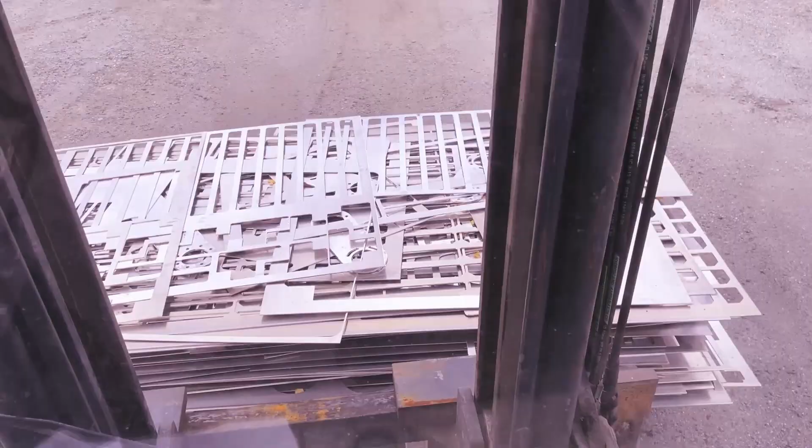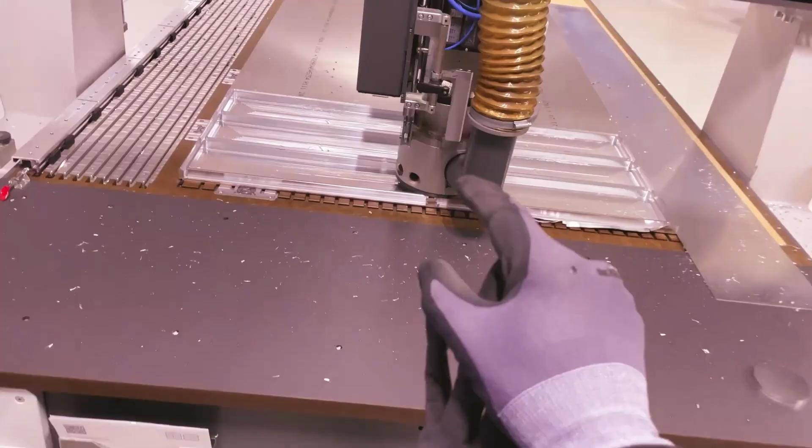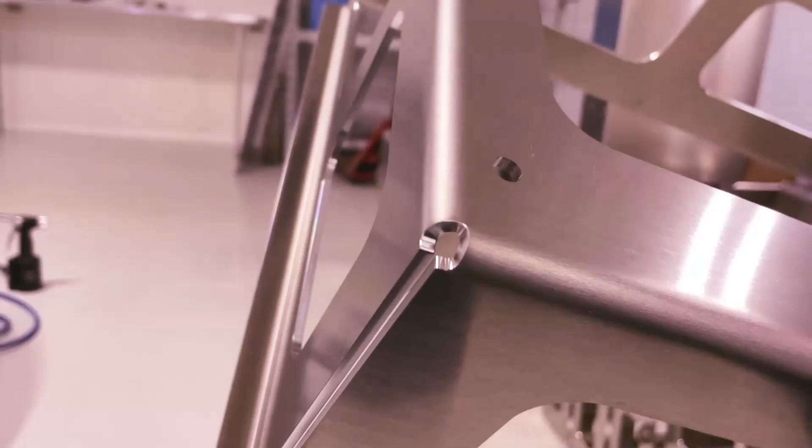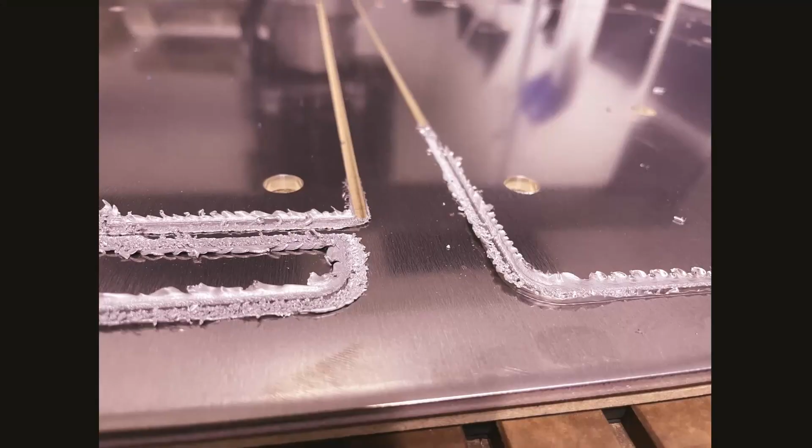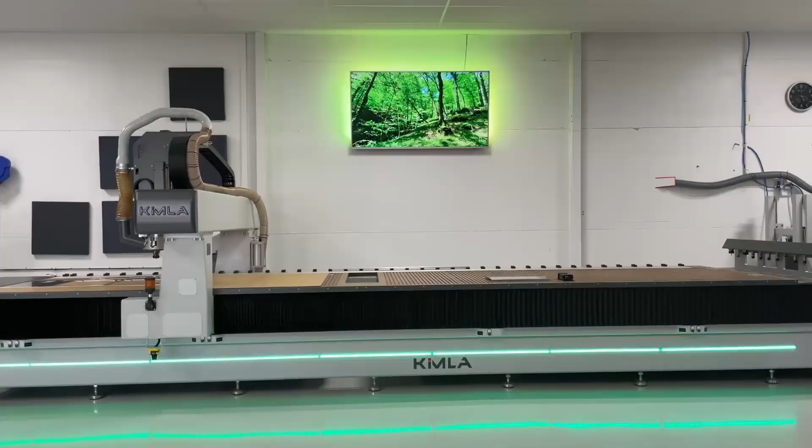So here I am in Västerås in a hotel with my wife, thinking about the only reasonable thing: ABB robots. Hello there.

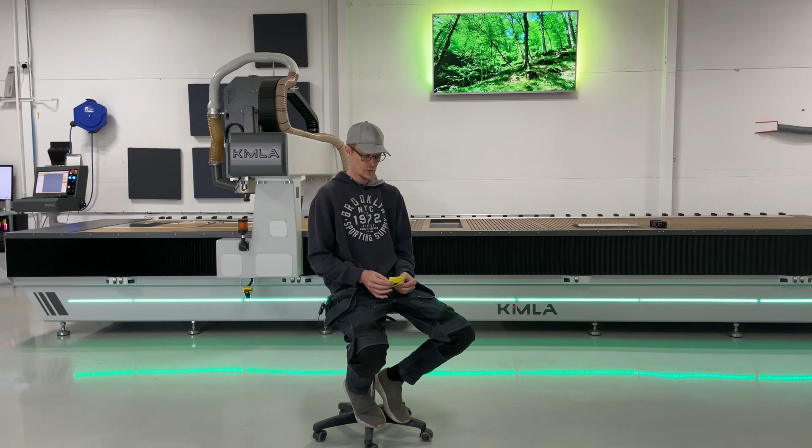So this is going to be quite a long video. There's gonna be everything in here. Hopefully, I say that now, but I'm gonna forget half of it, but you know how it is. So, I don't know if you saw an introduction video like 30 seconds before this, but I hope you did. And to quickly recap, it's been somewhat of a journey, as all journeys are.

So I opened a proprietorship in 2010 alongside my current job. Started off making furniture, mostly poker tables. Maybe there's a video showing you some poker tables right now. I used to drive a truck and be a crane operator before that, during that. And then the person who was holding the camera was born. And I did everything.

And we invented a snow melting machine that melts snow for the city of Stockholm, and it was good. It was exciting for a couple of years, and we got it patented and whatnot, but yeah, that's pretty much over. And I built my own CNC, as most of you have done. Mach 3, etc. Never again. Some Linux CNC too. Watched Grimsmo do his thing. Watched Saunders grow up on YouTube, basically.

And after having built 1.5 machines, I found a used 2000s Multicam router, which I, for a year or two, converted to be better at cutting aluminum, because that was my interest, my passion. There's probably a bunch of clips for that too.

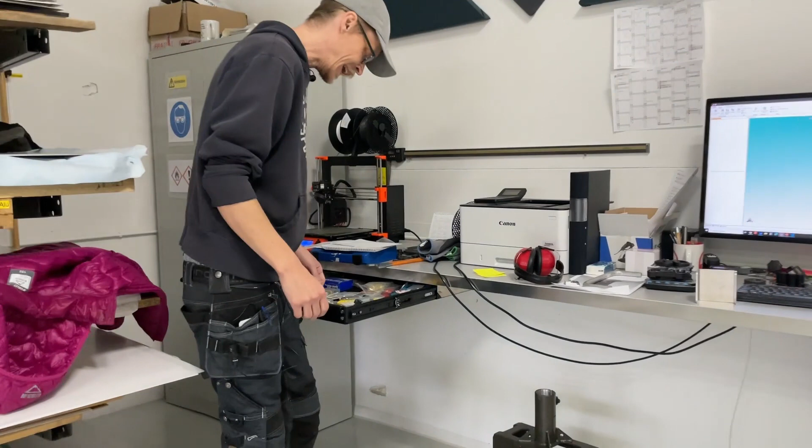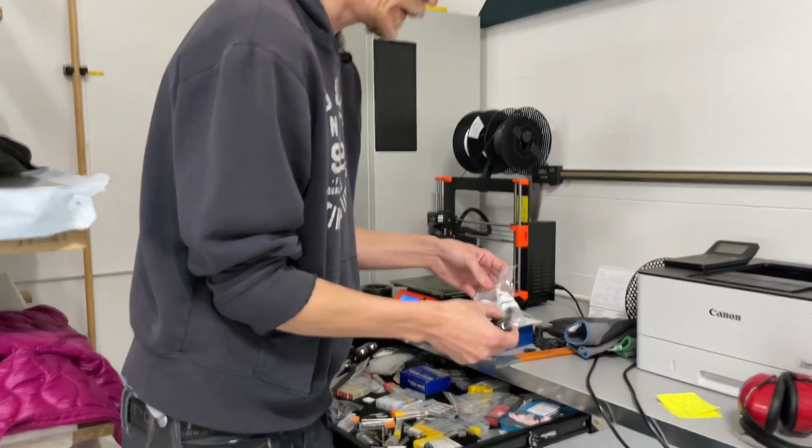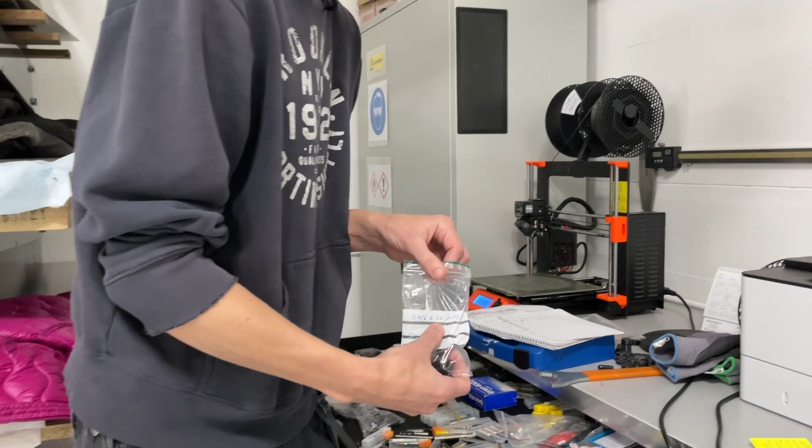So what I did was I bought uncoated 4mm Kronor tools, and I sent them to IonBond to have them coated with their best type of coating, and that coating is really reminiscent of the original coating on the Kronors. Super good, clean cut, no stickiness. So they're my new go-to pretty much. And of course I haven't prepared anything, so I can't find them right now, but anyway.

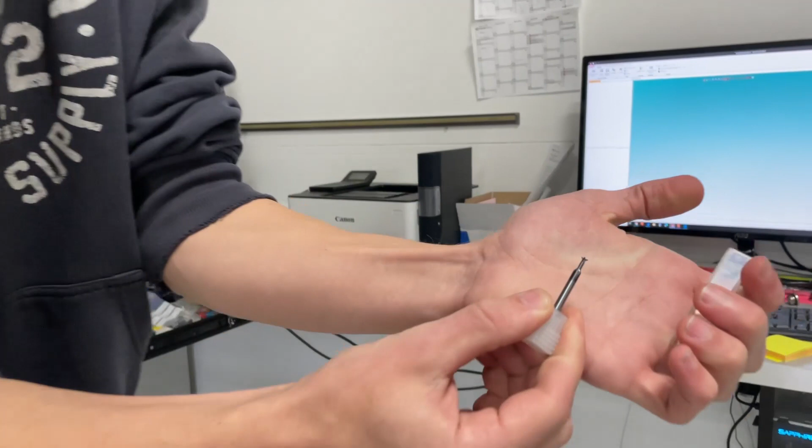Another one of you guys on the net asked about the undercutting tools. I might as well show you those. Hopefully the camera is able to focus. Can you see that? Syns det? So it goes down into the cutout of the 4mm tool. There's a gap, of course, of 4mm since the tool has just been there. So we go down into there and underneath the aluminum edge and all the way around. And then we back out before we go back up again. Hopefully there's some graphics or something I can put on screen right now so you can see how that works.

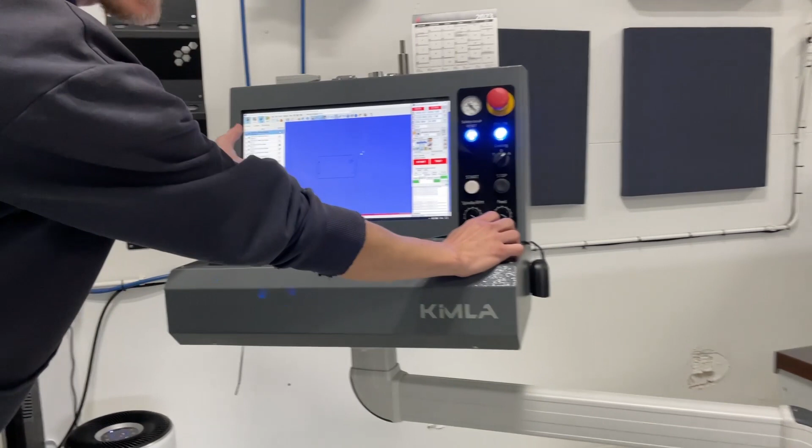I've made templates for all of those things, of course. So this is the piece from yesterday, and the last pass is the bottom chamfering. As we can see the path here, that's the white line there, and as you can tell, that's our entry point. We go down in Z, underneath the material, all the way around the part, and up through there.

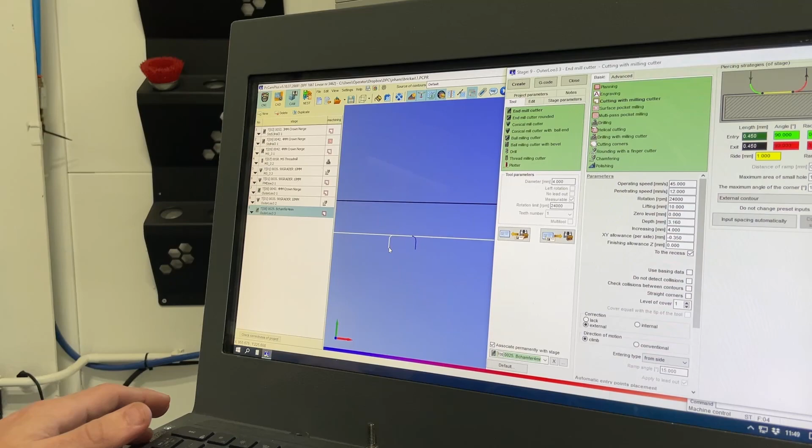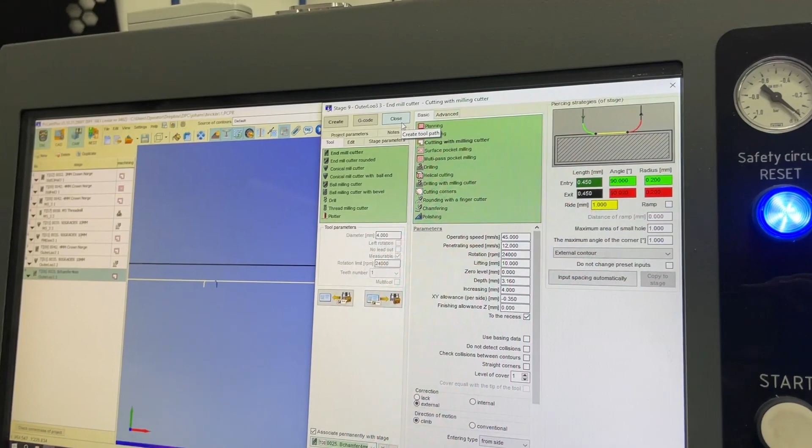Here are some cutting parameters, just 45mm a second, and I'm going 0.35 underneath the sheet. We're going slightly past the sheet, of course, because you don't want the very tip of the tool touching the aluminum. So yeah, that's how that works. Can greatly recommend.

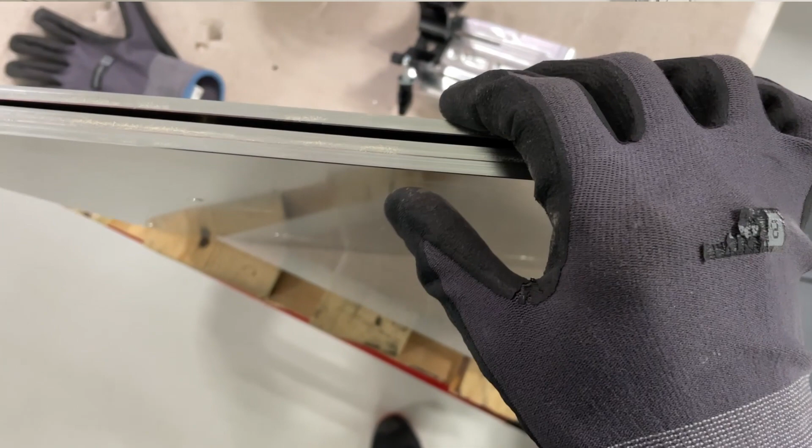Also, this was brought up recently about tension in aluminum sheets, and that is a problem. If the sheets aren't flat, it's a headache, truly. When you cut stuff out, it tends to flake up and you can't chamfer it. I even crashed my suction cup into one of those pieces, so I've had to modify or push it back pretty much. It's fine, but it is definitely a concern.

Turns out I sent those sheets back, and I got 10 new ones. Same problem again. I sent them back again, and I asked them to find out where they came from. That specific batch was from China. They buy from all over the world. So third time's the charm. I asked them to send me some sheets that came from Germany, and those were as flat as they normally are.

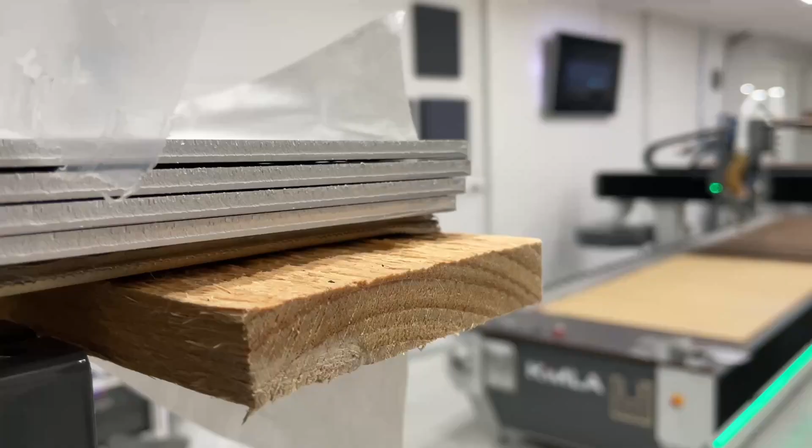This was maybe the worst case so far, and it has affected me in a way that I'm probably going to request always getting my sheets from a German manufacturer, just because it's such a headache when there's a bow in the material. Hopefully there are a few clips I've been showing you during this discussion. So yeah.

Let's see. DLC coating. We have DLC coating. We coated our press brake tools. Let's do this thing.

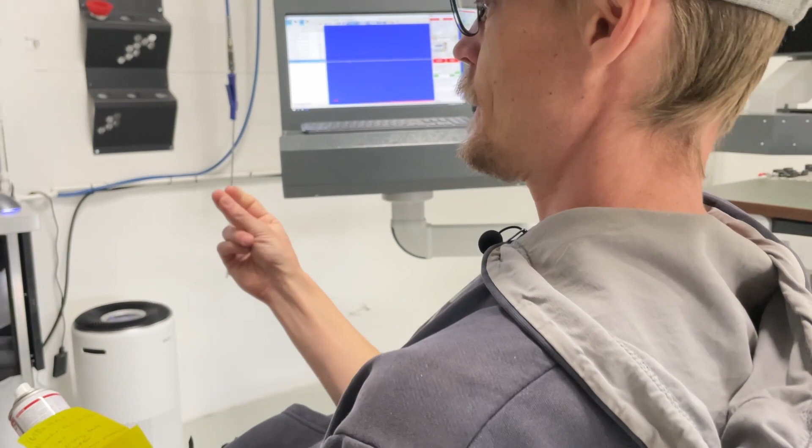Let's do it like this. Well, while the tools are away for DLC, we've earned a week of vacation. See you back in Sweden.

Jesus Christ. What is this? Having to scrape the inside of the windshield at minus 10 Celsius. I miss the beach.

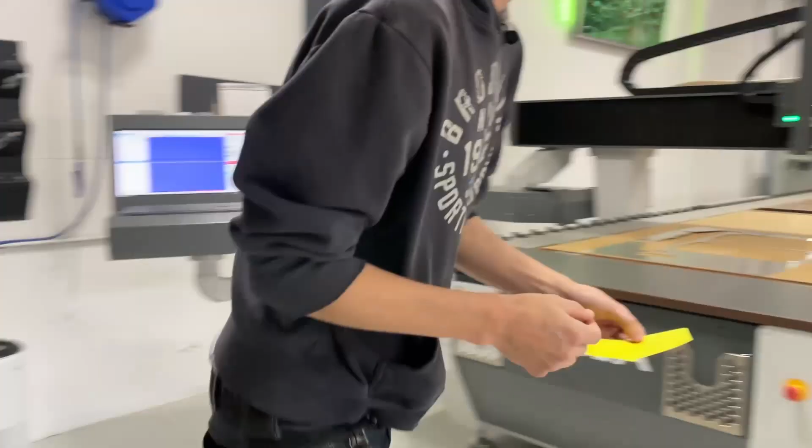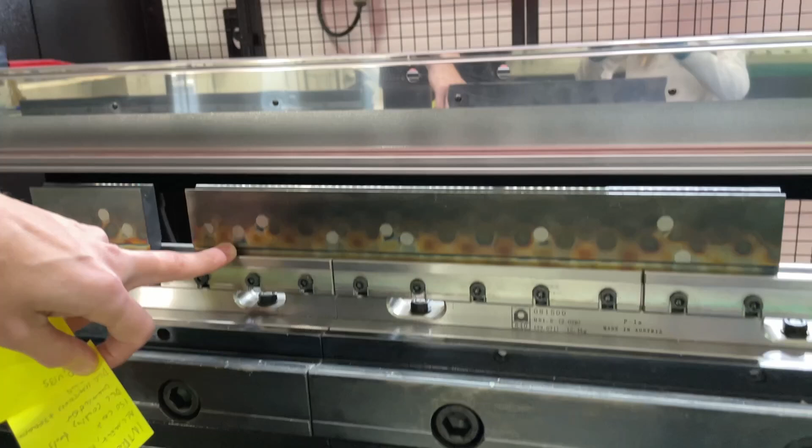DLC coated press brake tools. You can clearly see the magnets that have been holding these in the specialty machine. So this top surface has actually been DLC coated. It's not exactly the same type of DLC as the cutting tools, but it's a DLC. The point of that is to not have aluminum get stuck in the die, because it's going to mar the aluminum and affect the precision of the angles and everything.

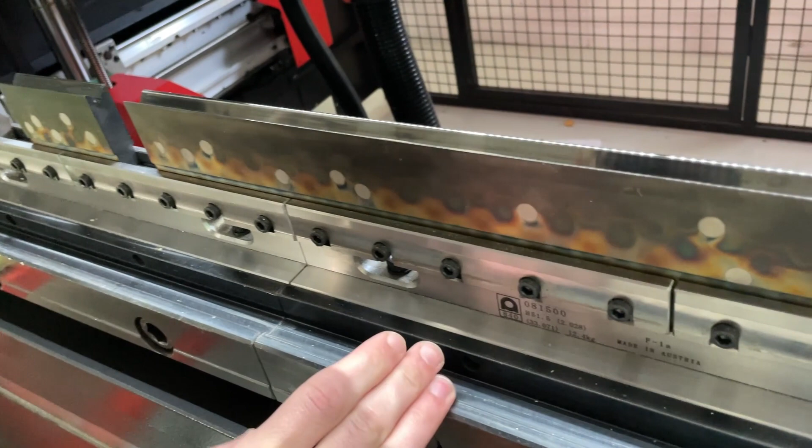And having the felt here, which I've been using all this time, really does affect the angle precision. Disclaimer: while we were away, I sent all my tools at the same time for this treatment, and the result was not optimal. We're working with the supplier, so no problem, they're taking care of it. They're going to recoat a bunch of stuff.

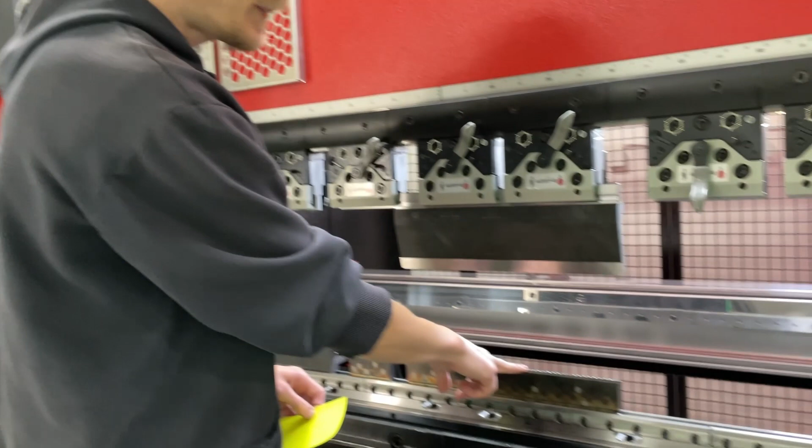But I can tell you that when it works, it's amazing. I've probably done 150, 200 bends in this specific area. You can't even tell, there's not a speck of aluminum on there. And like you saw on that piece we made yesterday, look at these bend lines.

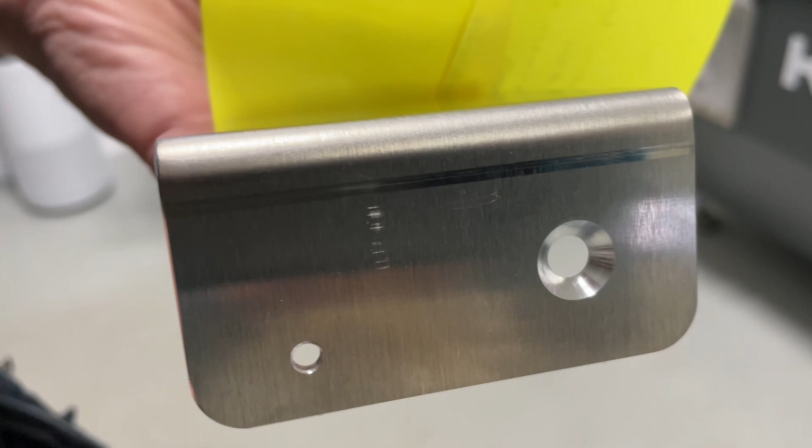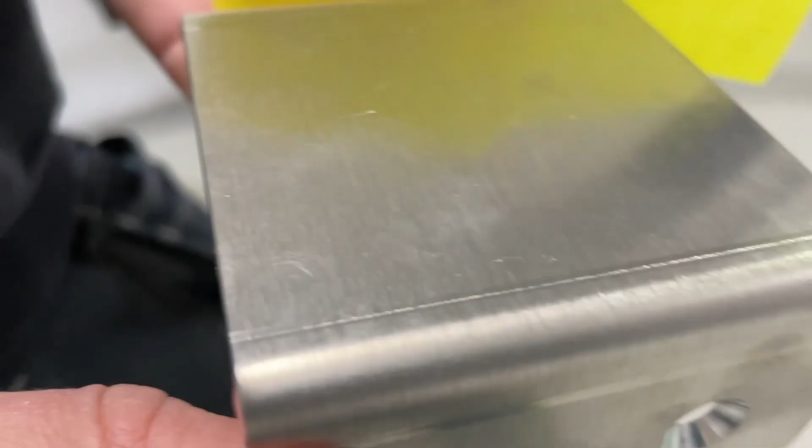They're really shiny, and you can't really feel them either. I keep telling myself that I can feel them, but I'm not sure. So that's really nice, because it does affect the overall appearance of the part. Having zero scratches is not necessary most often, but it does feel like higher quality. In people's eyes, it's going to look better and feel better.

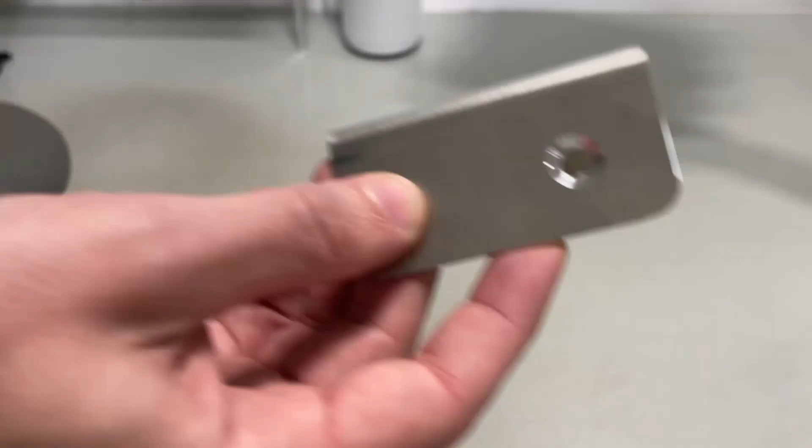So that is why. The company is Ionbond, so let's see if we get all these dies fixed, because that's a game changer. That's going to be really nice. Let's see what's up next.

We've got the automation, Power Automate. We've got our VB scripts. We've got to talk about some AI. That's a game changer as well. We're going to take a quick look at the suction cup. We got a question about that, and we could do that right away.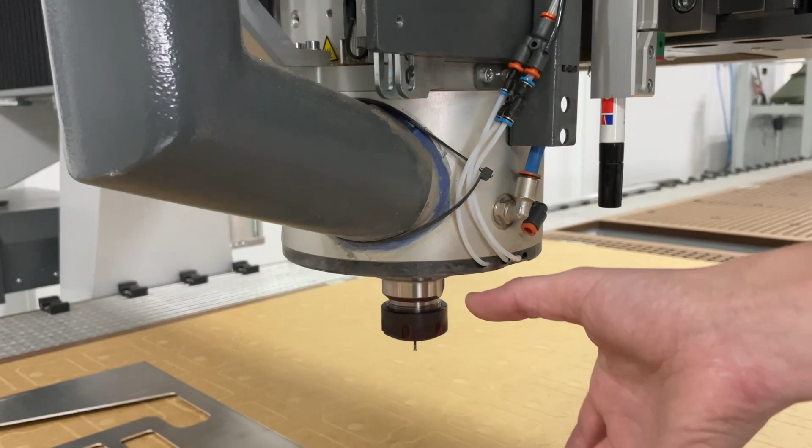So this part goes up and down on these guides in here, pushed by these pneumatic rods. This cup is this thick, and the platter is 3D printed to allow these PTFE tubes to be guided to the center of the tip. Let me lower the cup so you can see that.

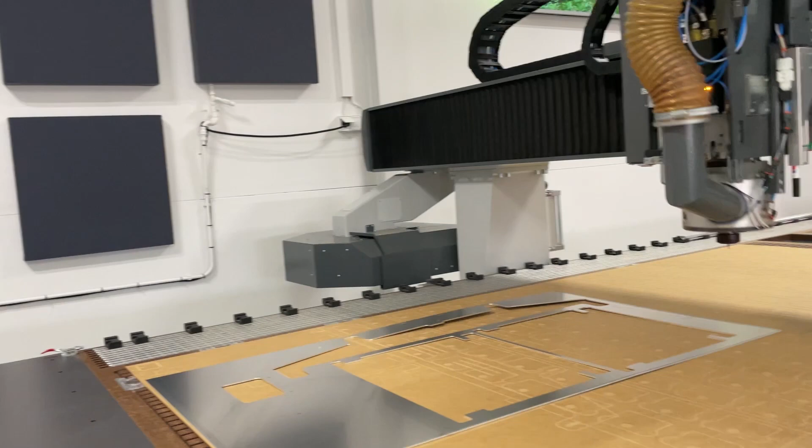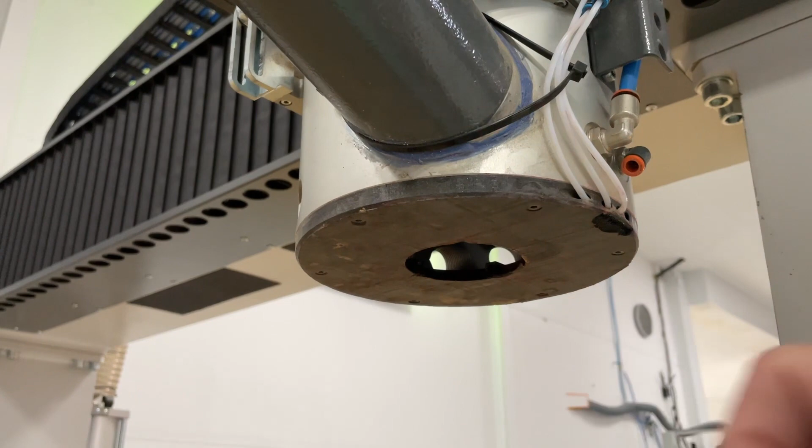Maybe you can hear that the extractor started automatically. There's a pressure switch in there that's activating, sending a signal through the radio transmitter. Let's see. Let me start the compressor; its valve opened automatically as well. It's going to take a second to build up pressure, but hopefully you're still able to hear me.

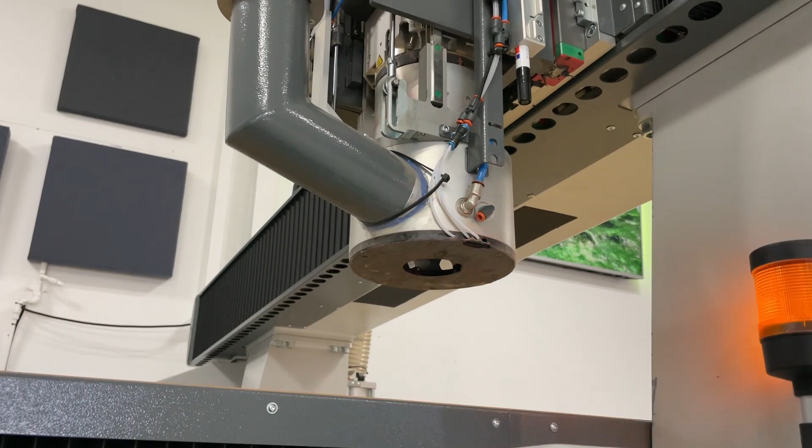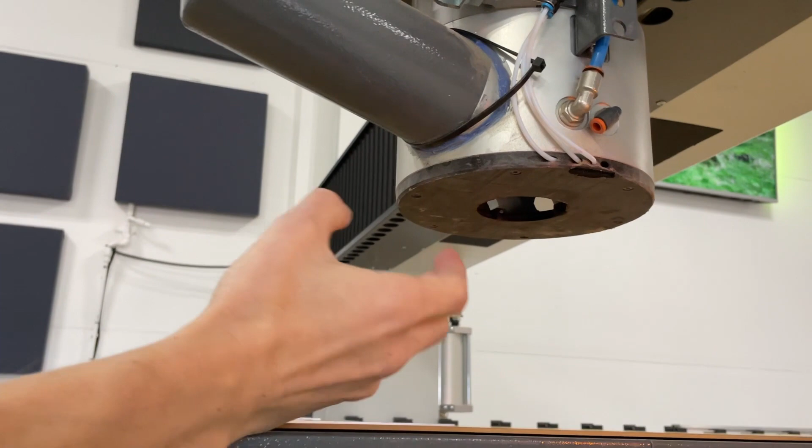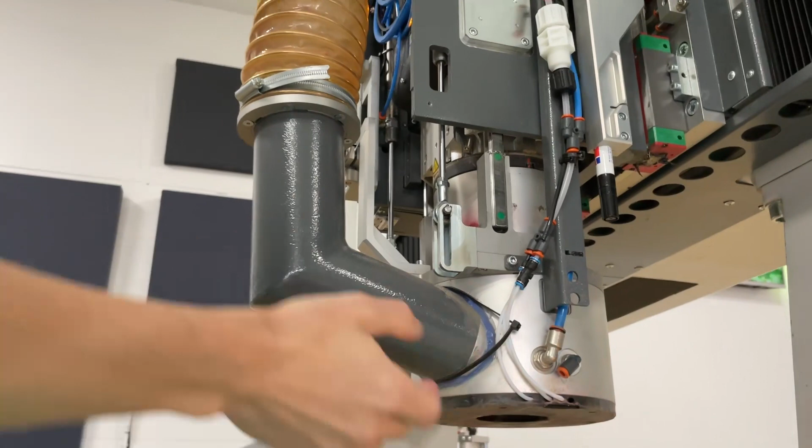I don't know if you can see that, but there are some tiny ethanol jets coming out of there, and there. Ideally there would also be one there, but I don't have that for now. To reduce my ethanol usage even more, I'm thinking of having these tubes extend closer to the end mill, driven by the air pressure that's forcing the suction cup down. Hopefully that didn't sound too bad in your ears.

And while we're on topic, I just have to mention that this machine has been amazing. The entire business has been built using this machine. And of course, I'm always focusing on the next problem, the next improvement I want to do, but my God, this has been such a dream machine to have. I can wholeheartedly recommend it more than anything.

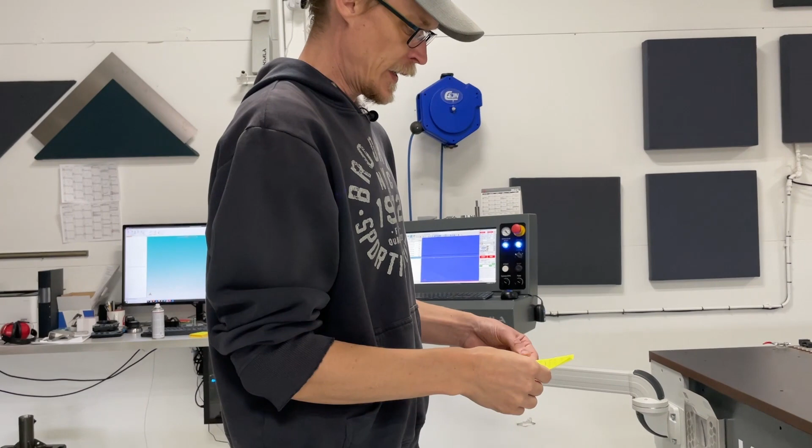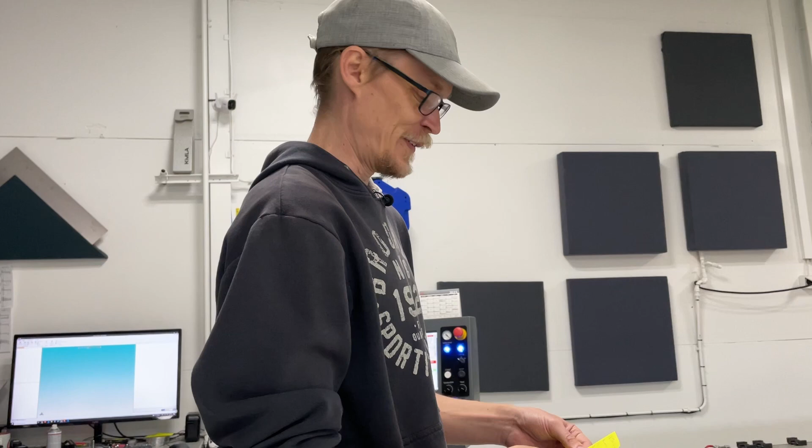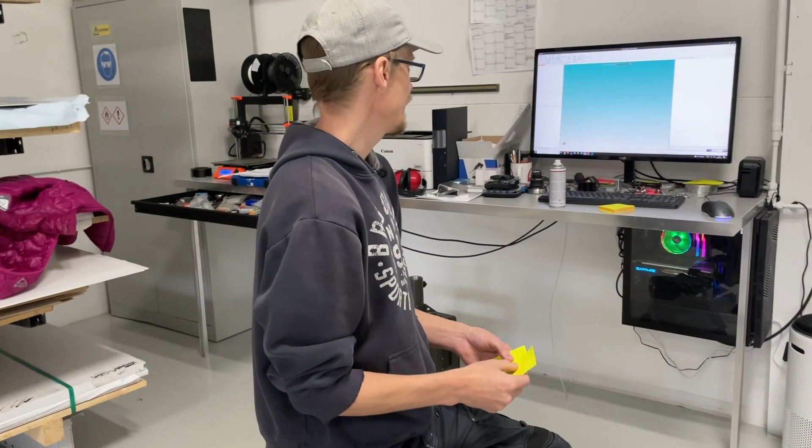So let's see. I'm probably gonna switch over to recording the screen for the Power Automate, the VB scripts, and some AI. Okay. So this is gonna be quite intense probably. This is not gonna be much of a tutorial because there's a lot better videos out there for that. So I'm gonna try to keep a tempo here so you don't get too bored.

But so this is Windows Power Automate. This is an RPA tool, a robotic process automation. It's an amazing, game-changing thing, of course. So get into this if you have the chance or possibility. It could really automate a bunch of stuff in your current business. So let's have a look.

So I start off with a loop condition just because I want this to continuously run in the background. I don't want to run it separately one at a time. So as long as 111 is equal to 111, it's gonna keep looping this. The first is just a label, ignore that. It's waiting for a specific window to show up. That way it knows that it's time to get to work.

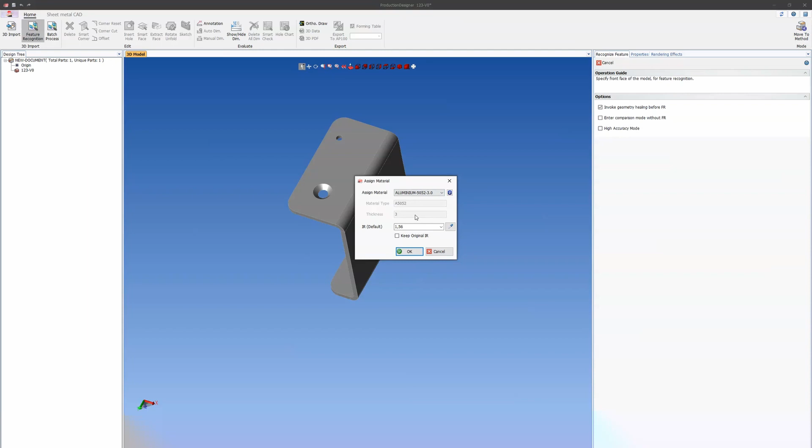And when that window shows up, I can show you like this. Let's take our part from yesterday. So me selecting a surface that is going to end up being the top surface in the CNC router, this box shows up. And this value, the thickness of the material, that's of interest to us. So it's going to pick that out and save that in a variable for later. And as I said, when this shows up, it knows that it's gonna get to work. So it's gonna automatically click this OK button and present us with a little box.

So let's run it so you get to see that happen. So that's our box. It's gonna save the thickness and it's gonna present us with this thing. So I've set it so if I have this checked, then it's also going to make the bending program. I don't always want to make that because if I had 10 different pieces to make, I leave this unchecked, so I process them, the DXFs anyway, and I get my worksheet printout for all 10 parts.

What I then do is import all 10 of them in the bending program at once and try to make a common setup. That means that it's trying to make it so that one tool setup in the press brake actually can bend all of the parts, so I don't have to make different tool setups. That's really a time saver. So let's stop that. So after I've clicked this run button there, here's our custom form, by the way, that thing we just saw. It's going to send shortcut keys to the program. Let's see what that looks like.

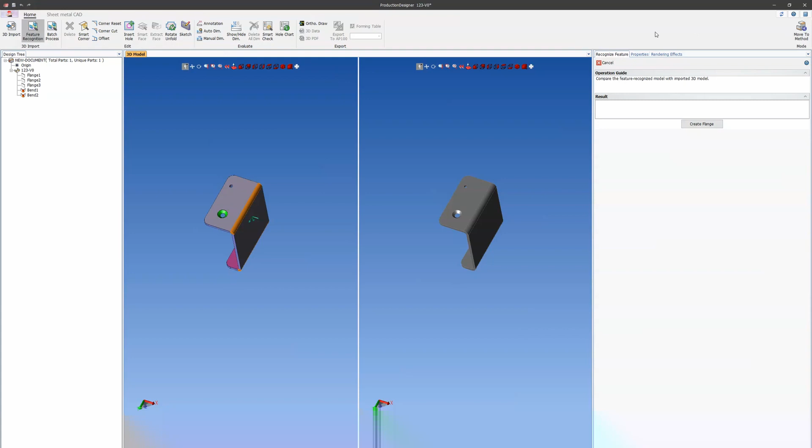So me pressing Alt, that's going to present up in the left corner there all of the options you have. So if we go to H, we can see a bunch of new options, and up on your right there we have MM. So me pressing MM, that's gonna press the button for us. Really sweet. So after that, it's gonna wait half a second and then send the return key. That's gonna automatically press that OK button. This part is not that interesting. It's gonna go on and run an X and Y subflow after doing some certain things.

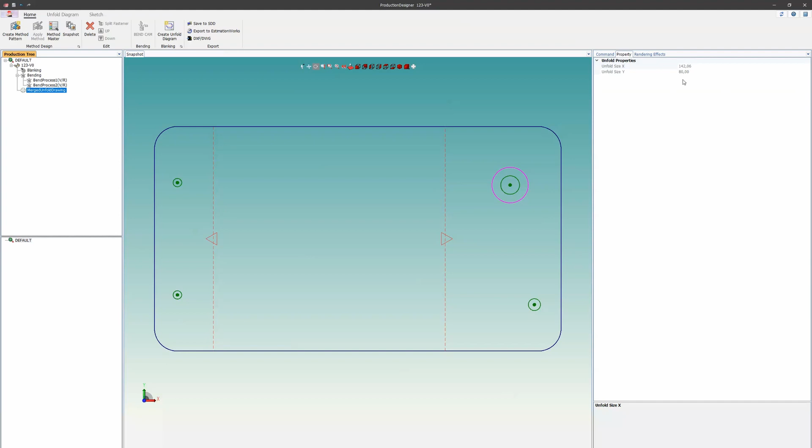Let me show you. So it's gonna click this button to create the unfold diagram. And of course, this is something I have trimmed in so that it really corresponds well with the real world when producing a part. Then it's going to pick out these dimensions in X and Y to be able to calculate the material usage and therefore cost. It's also going to apply a certain percentage of excess material. That's always going to be the case when cutting stuff out. And how big that percentage is depends on the size of the part.

I don't think my cost estimation is really correct at this point. I'm not really monitoring it yet. I will in the future more, and that's when it gets more important that it's correct. But just know that. So after that, it runs a part name check. That's going to be this thing. All it does is check if the part name begins with ANL, then it does something special for that in that case, and different for IGN or SACOM. Not really applicable for you probably.

And when saving the DXF, it does a bunch of tabs just to get to the correct checkbox, if you will. So let's move on. So if a specific window shows up with an error message in the title bar, then it's going to click left and then send return. So it moves on.

Okay, so we're gonna be taking a screenshot of the part. Well, before we get to that, it's gonna press this default button, and that's just for this to show up again. And then it's gonna take a screenshot of this and save it to the same folder and name it to the same file name. Let's see.

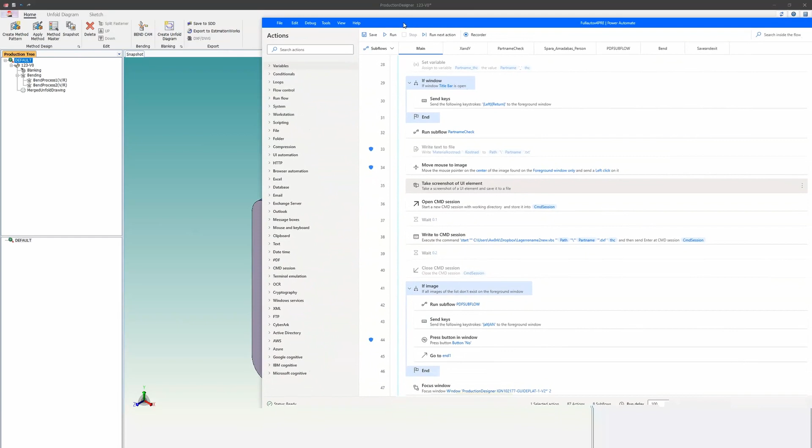So then it's gonna start up a command session and run a Visual Basic script that I have written. And what that does is, let's see, this is the layer rename tool. That's just a layer renaming Visual Basic script. And if you know anything about Visual Basic scripts, you're gonna think that this is a mess, because it is, but it works, so you know how it is. You don't clean it up until you have to.

Pretty much what it does is it takes the part name and the thickness of the part into consideration so that it can change the name of the outer loop, that's the outer perimeter of all the parts, and change that to outer loop and the thickness of the part. The FM up and FM down are form tools because Production Designer is meant for Amada's machines, a punch press or laser. But I have registered certain operations to these form up and form down tools so that I can do countersinks using these features.

So the standard hole, that's a bit more advanced because we don't only want all our holes depending on the size. If it's too big of a hole, it's gonna be placed in the inner loop instead, because that means we don't wanna do a pocketing operation. Then we wanna cut the inside perimeter so that we don't spend forever pocketing a big thing with a 4mm single flute, for example.

So what we do here is we find specific areas of our DXF. A DXF file is just a text file, so you can open it in any text management tool, Notepad, whatever. And since this is a regex pattern, that way we can find all instances of every hole in the DXF. I'm not going to go too deep into that. You can ask if you want to. There's a lot of commented stuff because I don't need it anymore.

This section, well, let's say an M6 hole. So this row checks if the radius of the specific hole is between 2.511 and 2.54. And if it is, then it's going to change that layer name from standard hole to M6 dash and then the thickness, so that the CAM then knows that that specific hole is an M6 hole. That way it's going to first cut the hole, then it's going to thread the hole, and then it's going to chamfer the top of the hole. The same for M8s, M10s, M12s, and so on.

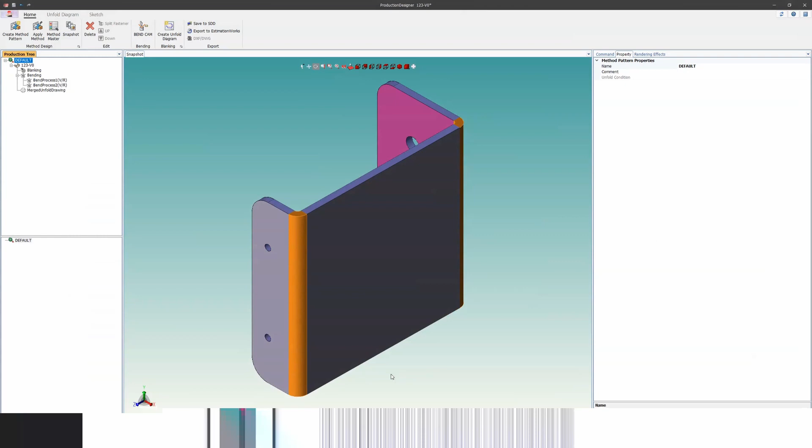so yeah, that is that. I'm also considering making an extension for Fusion so I can just do a thing here and it runs the automation. That's gonna be sick. Have I forgotten anything? We got the Power Automate, the VBS scripts, we got the AI. No, I think that's gonna be it for now, because we gotta get going.